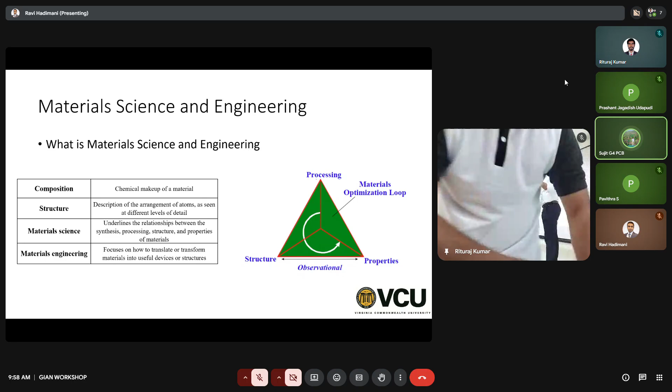Different properties, not just mechanical, also electrical. Your transformers and adapters, when you plug them in, have iron cores, and so many fans have iron inductors - those are electrical steels. There is structural steel and electrical steel. They may have the same composition, but their electrical properties and structural properties will be different depending on the crystal structure, morphology, and atomic structure. You can have the same composition in different crystal structures - that is the structure.

We have to first come up with the right composition, then the right structure, and then using the relationship between structure and chemical composition, you design the process - how to make this material. That is processing, and when you process with the right structure, you get the right properties. This is called material optimization, or material engineering - basically taking the right composition, right structure, and having the right process to get the right property. That is what materials engineering is.

Material science - usually wherever you find materials engineering branches or fields of study, it's called material science and engineering, because there's a lot of engineering to it as well. So this is material science - we will be looking at not just composition, but also structure in order to get the right property.

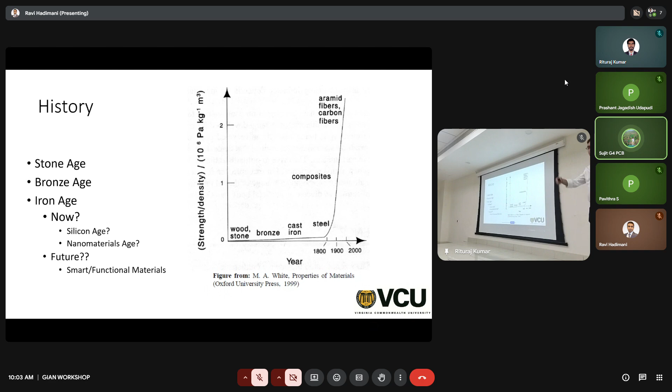So if you classify the materials, they are generally classified into four categories: metals, semiconductors, ceramics, and polymers. Metals are quite widely used for engineering materials, semiconductors for electronics, ceramics for high temperature applications, and also some functional materials are ceramics.

PZT - have you heard of piezoelectric materials? Do you know which is the most common piezoelectric material? PVDF is a polymer, yes. And the most commonly used one is called PZT. P stands for lead, Z is zirconium, T is titanium, so it's lead zirconate titanate. So it's a ceramic.

And then we have polymers, that is polypropylene, PDMS, PVDF, some cellulose-based polymers, hydrogels, and so on. And here is the new combination of all of these can be made into composites. So if you need a certain property of ceramic along with metal, but you need some flexibility, you can combine all these to make a composite material, which is a combination of all the materials.

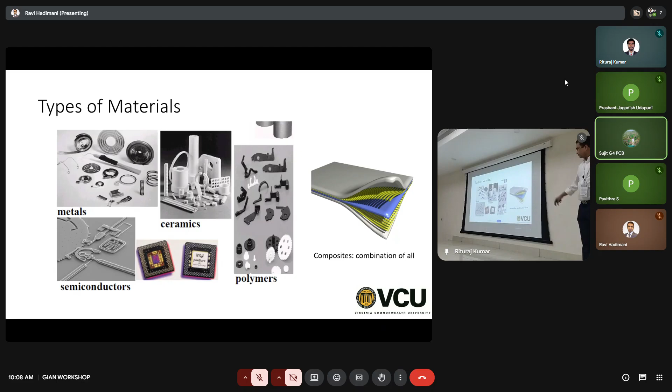But it needs huge computational power. You need supercomputers to do that. But if you have that, then yes, you can predict its strength. So that's now the scale of things, right?

In material science, nowadays we mainly operate at the macro scale. Now we are also doing the nano scale. Here are natural materials at different scales, here are the artificial ones, and at nano scale we operate nowadays. So, do you know your laptop?

It has an Intel i7, Pentium. How many transistors does it have? It's about 100 billion. The new i7 processor will have 100 billion in a single inch by inch square. 100 billion is a large number. It's hard to fathom, right? We don't deal with such numbers in day-to-day life.

What that means is the distance between the source and the gate in the transistor is close to around 2 nanometers. That's the level of engineering we are doing right now. So every 2 nanometers we have to put an electrode, a metallic structure, to make this number of transistors.

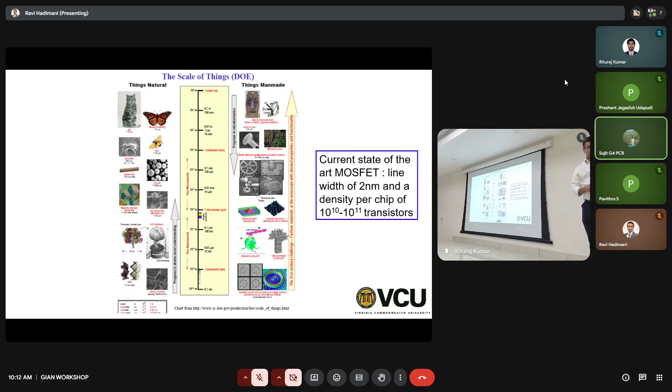So now let's go to smart materials. What are smart materials, or functional materials? It's interchangeable, when we say smart materials we mean functional. What are functional materials?

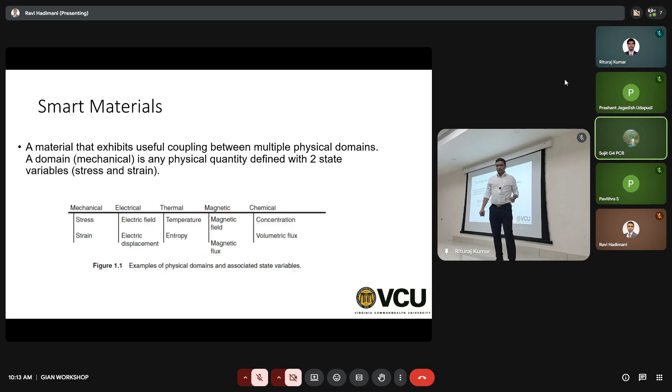Basically, when there is a coupling between 2 domains, that is, you apply stress and measure electrical stuff, which is voltage or electric field or current. You apply stress and measure thermal properties. So there is a coupling between mechanical, electrical, thermal, optical, magnetic. When you change one property and get a change in the other property, that's what we call a smart function, right? That is the coupling basically.

If you actually think about it, most materials can be made into smart materials. Because if you change the structure of the material, or apply a force, you're basically applying stresses to the crystal structure, bringing atoms closer together, changing the lattice parameters of the crystal structure. When you do that, the electric field also changes in the crystal, which results in some variation in the electric property.

But for a lot of materials, you will not see it. If it doesn't change the electrical property, its thermal properties might change. If its thermal properties don't change, its optical properties might. Something has to change, right? So we can actually make a lot of materials into functional materials, but some amplify it more. Those we call functional materials or smart materials.

They're very useful because a lot of the time we like certain materials, but for example, polymers are normally insulators. Can you imagine taking a polymer, applying stress to it, and getting a current out of it?

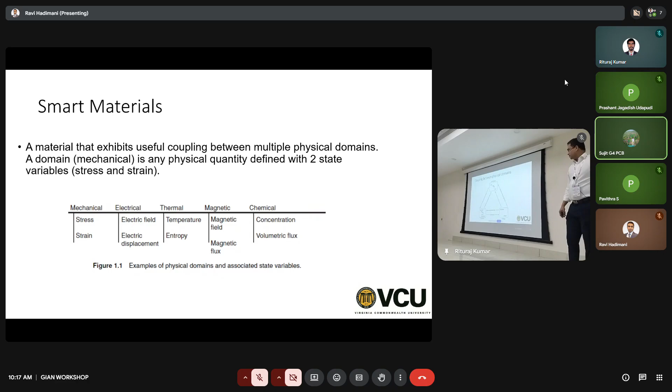It's easy to apply stress, and also easy to apply temperature. Now you can apply electric current easily because we generate it through circuitry. So that's the coupling between mechanical, electrical, and thermal. And if you add magnetic, optical, chemical, it becomes just complex.

Here is a diagram I didn't draw. It existed already, I thought it would represent this nicely.

If it is mechanical and electrical, you get piezoelectric. Direct piezoelectric effect is when you apply stress and measure current or voltage. But if you apply voltage and see change in the dimension of the material, that is converse or inverse piezoelectric effect. You apply electric field to get a rise in temperature of a material - it's called...

And if you apply temperature to a material and see change in current or voltage, that is pyroelectric effect. And similarly, temperature and mechanical stress - if you apply temperature, the material expands or contracts. That is coefficient of thermal expansion.

I don't know why these two arrows are the same way - if it's different, if you apply mechanical stress, you get temperature change. These are caloric materials, elastocaloric. So you apply stress and you get a change in temperature.

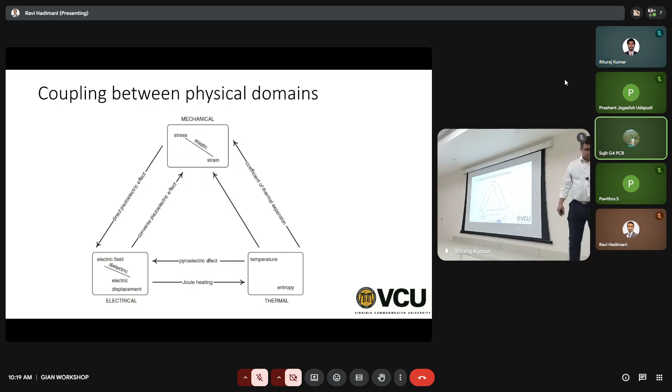So here are some examples: piezoelectric materials, shape memory alloys, magnetoelastic materials. Whenever there is 'magneto', it's magnetic field. You change magnetic field and you get rheology changing - that's changing the viscosity. And elastic is changing the modulus or changing the mechanical properties.

Caloric is changing temperature - this is magnetocaloric. Electrocaloric is you apply current and get changing temperature. Barocaloric - apply pressure, you get changing temperature. So elastocaloric and barocaloric: elasto means change in stress, baro is change in pressure. Stress and pressure have the same units, but it's the way you apply it - some are called barocaloric materials, some are called elastocaloric.

Then there are thermoelectric materials, thermochromic materials - you apply temperature, you get a change in color. That's because its optical properties change. Think of it, it's all like magic. If I show somebody a red polymer or metal, hold it at the bottom, then hold it on top and provide my body temperature, when it crosses 37 degrees centigrade, it changes color.

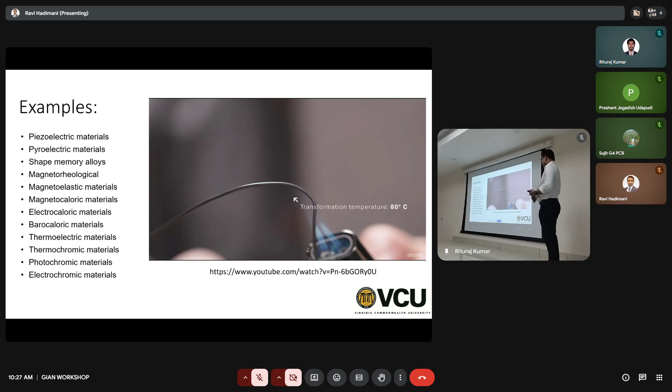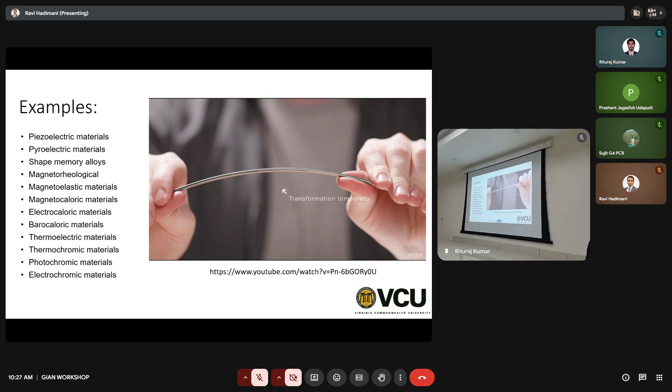So shape memory alloy.

It remembers its shape. What that means, what he showed there, I don't know if everybody understood it. Take this shape memory alloy, SMA,

take it to 500 degrees centigrade, which is its transition temperature, and then convert it into a certain shape. When you are at 500 degrees, you make it into a certain shape and you quench it. When you quench, it comes to room temperature. Now you remove its shape, you stretch it and it becomes a thin wire. And now if you go and heat it again, it will go back to its shape. So that means when it's at 500 degrees, you make a complex structure, even a Taj Mahal wire frame. Now you quench it and you remove all that, you make it again into a wire, put it on the burner and heat it again, it goes back to the Taj Mahal shape. That is the shape we're talking about.

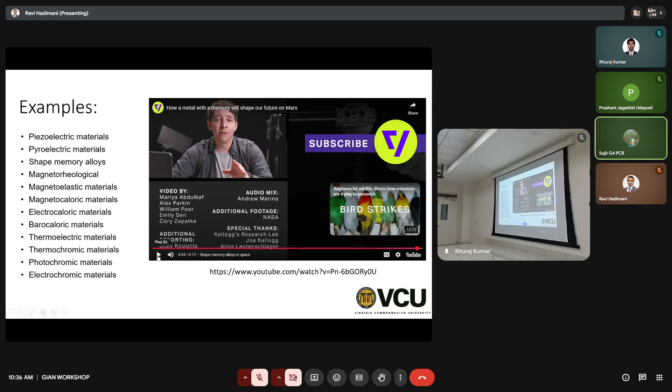Thinking of an actual device, right, or a sensor is also some sort of semiconductor device, but just a metal wire can act as a sensor or an actuator.

So now do you know what nitinol is chemically? Yeah, it's in the name, nitinol. So just imagine those two elements came together and made this really cool alloy. How many more such materials are hidden in these 118 elements? We barely know many of these elements. We just operate here because those are more abundant. As you go down the periodic table, they are there on the Earth's crust, but their usage has been limited.

Neodymium is used in the new neodymium iron boron magnets. We operated here. All these materials, this is responsible for silicon and germanium, responsible for our semiconductor revolution. Imagine if you go down further.

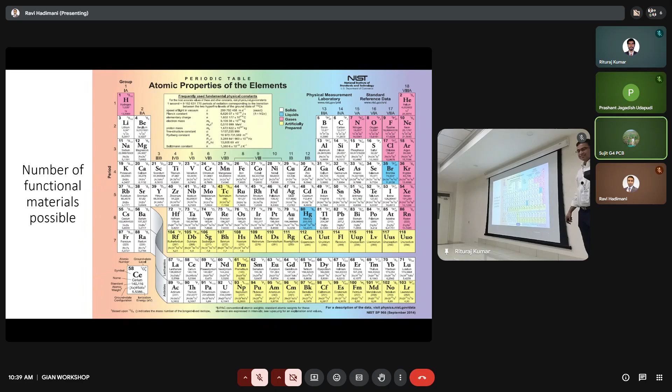Okay, so that is the composition, that is the chemistry, right. The shape memory lies not just in chemistry, it's chemistry a little, but also structure. Now let's go to pure structure.

Are you familiar with polymorphism? So basically it's the ability of the same chemical composition to occur in multiple crystal structures. For example, the iron system, that is iron and carbon, can occur in BCC, FCC, as well as another BCC that is different from this BCC. This is called delta iron, gamma iron, and alpha iron. This exists at very high, medium, and low temperatures.

So how many of you are familiar with the phase diagram, the iron carbon phase diagram? If you study material science, you have to know that. If you understand the iron carbon phase diagram, you will understand how amazing, how cool material science is.

Iron can exist in different crystal structures, and when they are in mixed phase, they form different crystal structures, then you alloy them. When you add carbon, you're basically putting these carbon atoms into interstitial sites in the crystal structure, changing its strength. When you apply stress, atoms normally move at a certain strength and create dislocation and plastic deformation, but when these carbon atoms come into the gaps, their strength changes. That's what we're doing here.

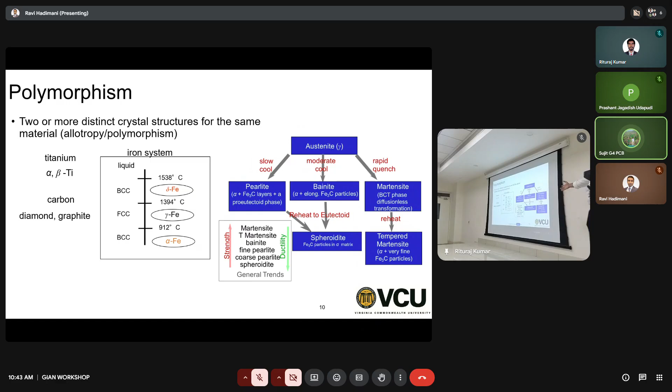These are all different forms of steel, and the ductility increases as you go down like this, and the strength increases as you go up. So you can engineer a material specific for your application. Swords need a certain strength, bridges need a certain strength, and rail tracks need a certain strength. So you can change it, and it's easy - you vary the carbon content.

So you're talking about only 6.7% carbon content. This is the binary phase diagram. Here it's all liquid, and here it's liquid plus solid. Here it's solid, with two different forms of solid. So it's a mixed phase here, single phase, mixed phase.

Depending on how much carbon you put, and also you can do thermal treatment - you go here and suddenly quench it, you block this structure. So there's so many things you can do, and they have done for ages. That's how we have so many varieties of steels.

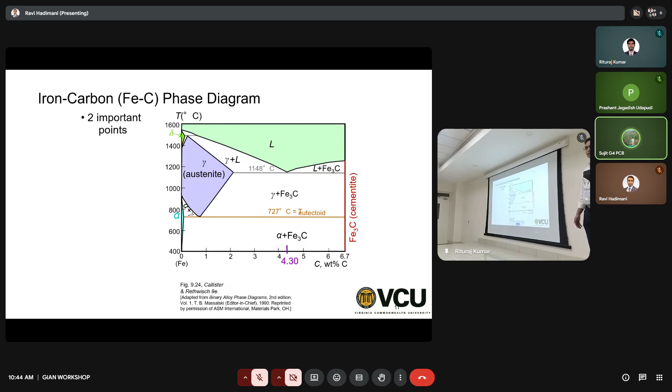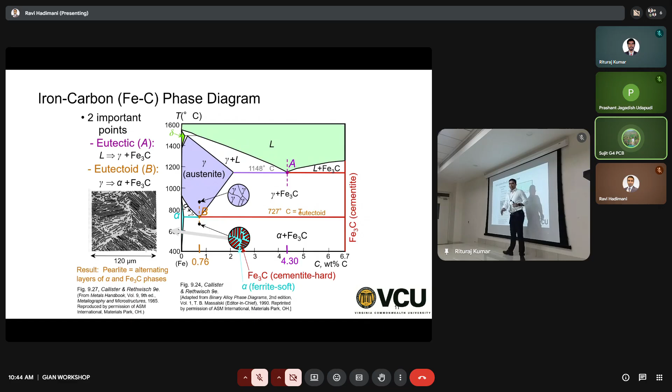This is pearlite structure, which is a very popular structure. And that was the binary phase diagram, iron and carbon. But if you do tertiary or ternary, with three elements, for example copper, aluminum, and silver, it becomes complex. Then there's quaternary, four materials, even more complex. So there's something called high entropy alloys - they have 5 or more elements. You're increasing complexity, but getting desired, really cool properties that you can't get with 1 or 2 elements.

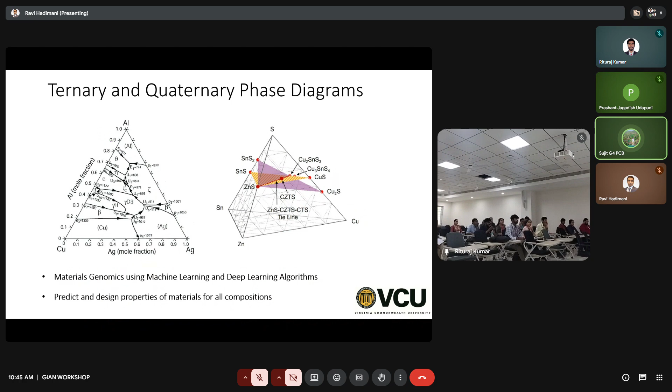There's a lot to explore there. It's what we call the wild west, even unexplored. There's so much you can do.

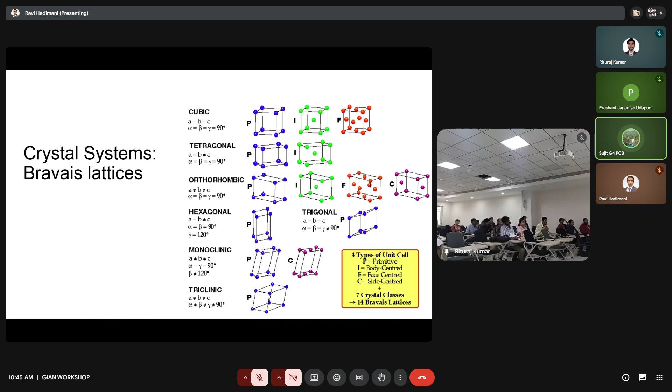Now let's come to the crystal structures - again, I don't know if this is fundamental. Basically how atoms are arranged - these are different types of crystal structures. If you have cubic, you have a nice symmetry, and you can have all these different arrangements, which you probably studied in your basics.

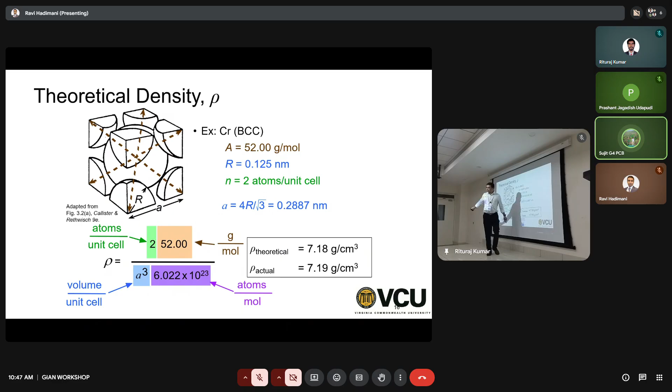This is BCC. BCC is 1/8 by 8 multiplied by 8, plus 1 body center - you get 2 atoms in BCC. FCC we have 4, and simple we have 1. This is the atomic weight, 52 for chromium, and divide by A cubed, that's the volume, then divide by Avogadro's number will give you theoretical density. So now my question is, how will you determine A and the crystal structure?

How do you know a certain material - if you have a material and want to determine theoretical density, how do you know the lattice parameter? Now we know what structure it is. If I give you a piece of metal and say calculate its theoretical density, what will you do? You need those parameters. How do you get that - A and crystal structure type, BCC?

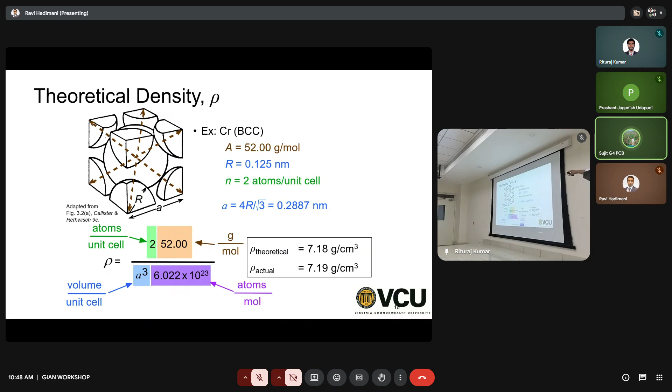Any guess? So different techniques are there. From XRD we can get lattice parameter and you know the crystal type, like BCC, by XRD. XRD is X-ray diffractometer. Are you familiar with XRD? XRD is a technique where you can determine what type of crystal structure and what are the distances between atomic layers. It is governed by a principal law called Bragg's law.

2D sine theta equals n lambda. So lambda is the wavelength.

So what happens is when you put X-rays on a material, X-rays go and hit the atoms and get deflected. Some X-rays hit the first atom and go there, and some X-rays go and hit the second and go, sensed by the detector. The detector is basically a sensor that senses X-ray. There is a difference in the path when the detector senses the X-ray, and that distance gives you the lattice parameter. So that is your D.

And n lambda, n is usually 1 because you get most of the deflections within 2 layers. Sine theta is the angle of incidence, that is theta. Lambda is the frequency, the wavelength of the X-ray. So this will give you D, the spacings.

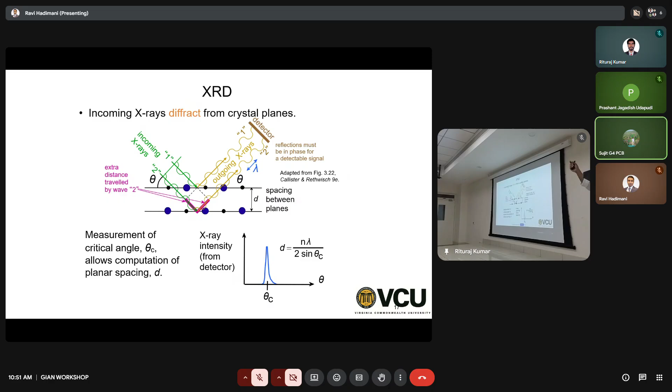And the patterns here will tell you whether it's a BCC or FCC or just a simple cubic. Once you know what type of crystal it is, what is your lattice parameter, you can calculate its theoretical density. You can also do a lot of other calculations. You can even find out its crystalline size or its grain size. You can even calculate if there is any residual stress inside.

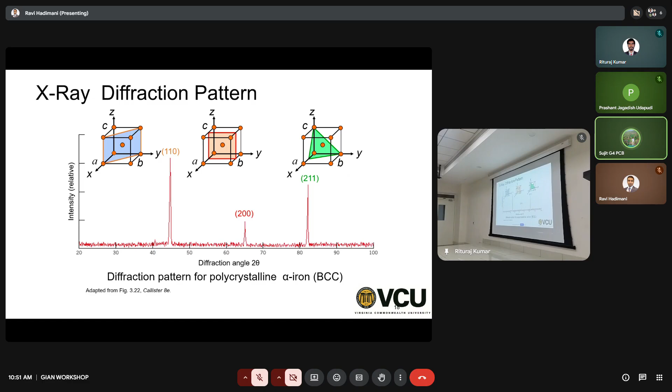And if it's an amorphous material, if it's not crystalline, the XRD result will show no patterns like this, no peaks, because there are no layers of patterns, so it doesn't get that D parameter. You have to have that D parameter in order to get constructive interference for the detector to see these peaks.

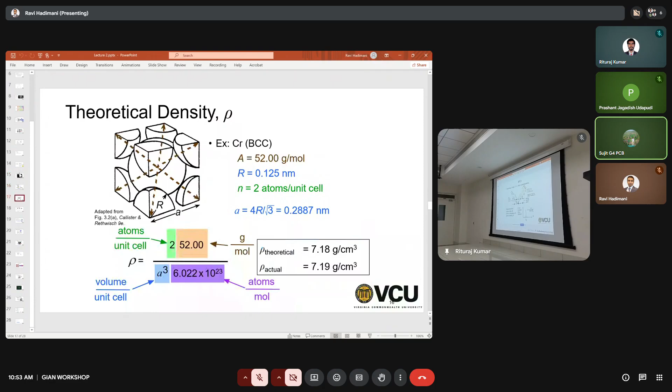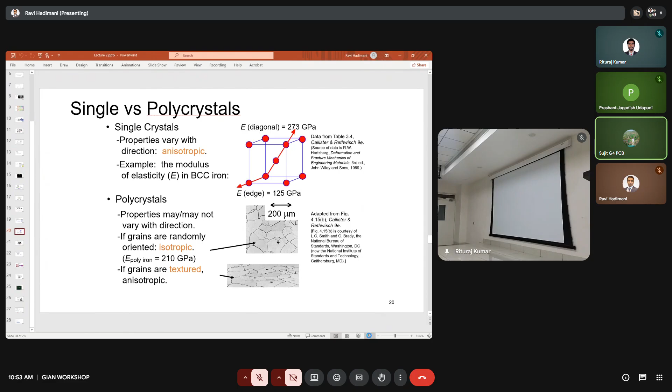Right, so now you looked at crystals and how crystals affect properties, and how crystalline parameters from the crystal can determine the density, its electric property, magnetic property, strength, thermal property, optical property, and so on. Now that's the atomic level arrangements, we finished the composition, now atomic level. Now we have to do the engineering part, the processing part.

So when you melt a material, let's look at a simple example of iron. When you take iron and melt it at 1600, 1650 degrees centigrade, it becomes liquid. When you start to cool it, what happens? It first becomes delta phase, gamma phase, and alpha phase, cooling down to different crystal structures.

But do you think it will all become one crystal structure, all the crystals aligned and having one nice single crystal? No, right? Because there are some impurities, it's impossible to have a perfectly pure material. Any small impurities will disrupt the crystal orientation and it will grow in different forms. And you see grains, right?

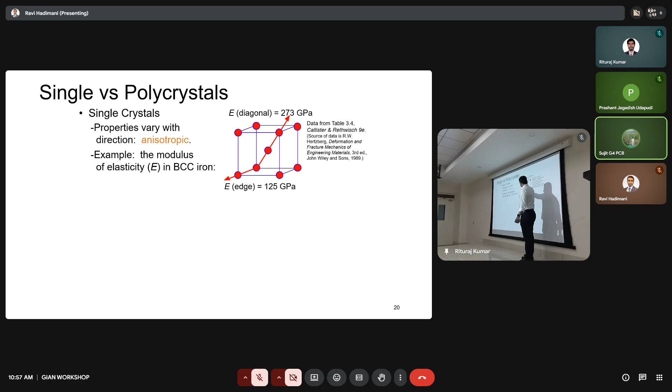So if you have a single crystal, what do you think will happen to the properties? If you measure properties—if you pull this tensile, if you measure tensile strength along this direction—what will be the strength, Young's modulus, versus if you pull it along this corner to this corner? Which one will stretch higher? Depending on the diagonal or this direction, it depends on materials, but they will have different properties in different directions. So that's one example of tensile strength.

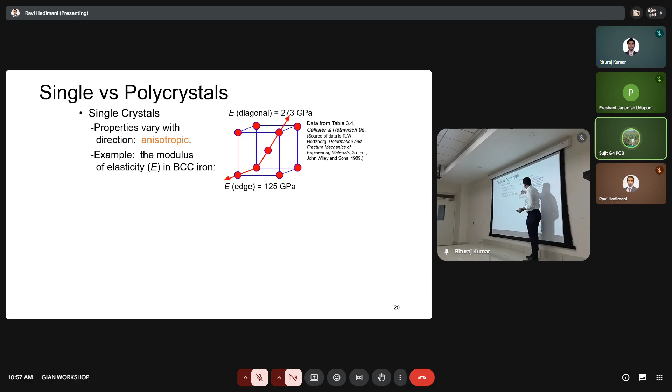But the same is true for electrical properties. If you apply a voltage from this corner to this corner, the conductivity will probably be higher here because the distance, the bond length, will be smaller here. Bond length and bond energy will determine a lot of material properties. By changing the crystal, you can get different material properties—you will have a different material property along the diagonal than along the side.

So that is anisotropy—you get different properties in different directions. If it's a single crystal, then everything is well aligned. So if you take a material and measure tensile strength along its shorter dimension, you'll get one property, but if you measure along the longer axis, you'll get another property in a single crystal. That's because they're all aligned in one direction—that is single crystal.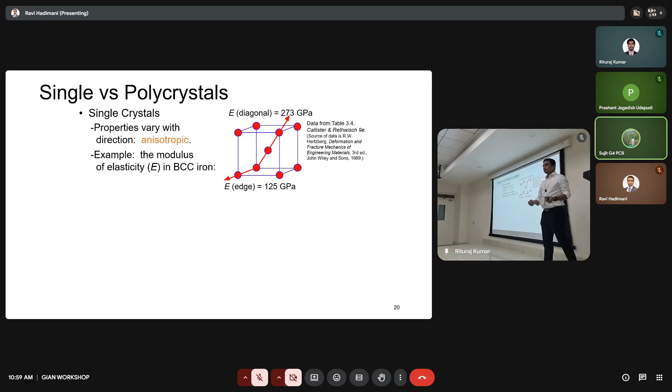But it's impossible to get a single crystal in a furnace at industrial scale. So you get all these different crystals oriented in different directions. What happens if you take all these small grains, where each grain is a single crystal material? Have you seen these grains in any of the examples I gave with pipes? You can see sometimes on these large metallic pipes, especially if the metal is polished, large geometric features on the surface—those are grains, nothing but grains. In those grains, each grain is a single crystal. Some materials can have large single crystals at a given processing parameter, and some materials can have smaller ones.

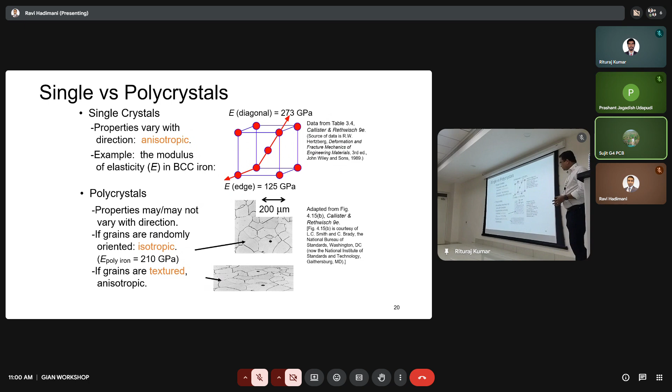So in polycrystalline materials, when the grains are all randomly oriented, what happens to your anisotropy? There is no anisotropy because everything is aligned—it all becomes a combination. So wherever you measure, your strength, Young's modulus, or conductivity will all be the same. Polycrystalline samples are not anisotropic—there is no anisotropy in polycrystalline samples. When you take an ingot, pour a liquid, and cut it open, these are the grains—that's how the grains are. Each grain is a single crystal, and they're all randomly oriented.

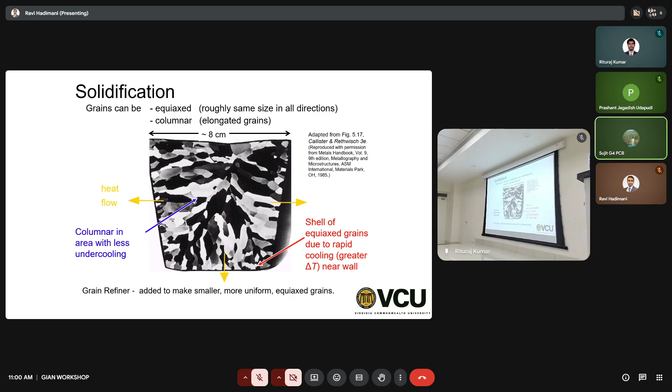So now the last engineering part. I talked about how composition can determine properties, how the atomic arrangement can determine properties, and the processing parameter of single crystal versus polycrystalline. The other engineering method is engineering the defects in the material. As I said, it's impossible to make a material that's perfectly pure, so you will invariably introduce lots of defects in a polycrystalline or crystalline material.

When the atoms are aligning, sometimes there might be a missing atom. Sometimes when it is aligning, it might just align in a slightly different direction. So these are all different defects. The types of defects are vacancy atoms, interstitial atoms, substitutional atoms, and dislocations. These are point defects. Dislocations are line defects. Does anyone know what the other defect type is?

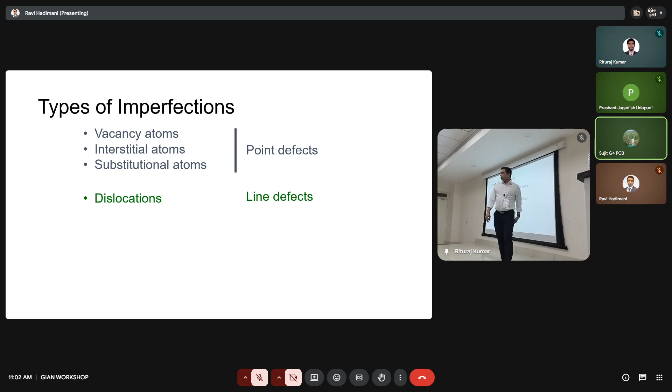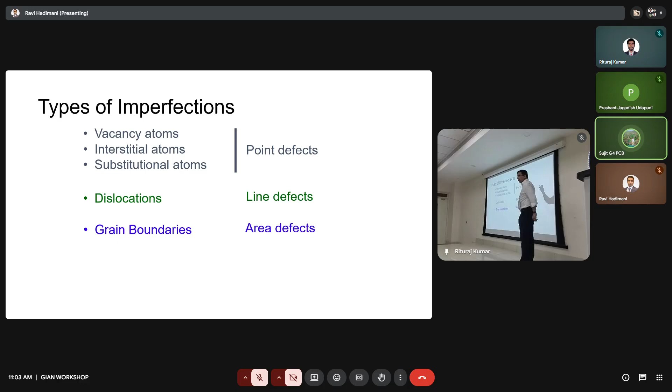These are defects, but actually you can use these defects to your advantage. For example, you can use substitutional defect—the way we make steels is nothing but substitutional defect. How do you think the carbon goes into the iron crystal? Basically you're putting an impurity into the crystal and changing the strength, the hardness, and so on. You can use these defects for your advantage, not just in tuning mechanical strength, but also in magnetics and electrical materials, where they play a very important role, especially dislocations.

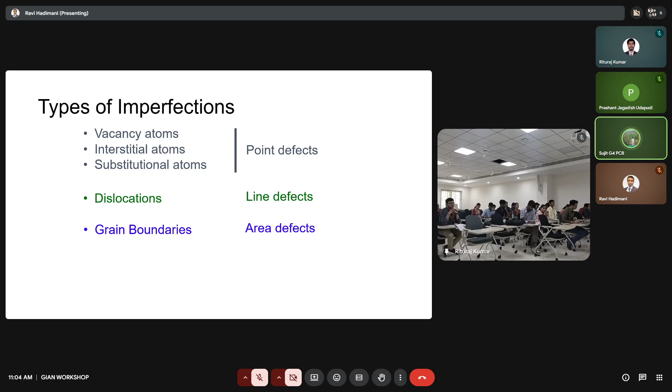We can control the percentage or density of dislocations and point defects to our advantage, and tune the properties of materials just the way we want by controlling the defects. The last one, grain boundaries, is used for catalysts.

So for catalysis, you create grain boundaries such that you create a lot of surface area, and that's what makes a catalyst. I'll take one more minute to show the difference between pure metal and substitutional alloy. Substitutional alloy is basically changing one atom with another atom, usually with similar atomic radii - for example nickel, cobalt, iron have similar radii, and you can substitute them without changing anything.

When you take an XRD of a substitutional alloy, you don't see any difference. Same with interstitials - you add some carbon to these elements, and if you take an XRD you will see the same crystal structure pattern. The lattice parameters might slightly change because these can introduce some residual stress. Then this is both combined, interstitial and substitution.

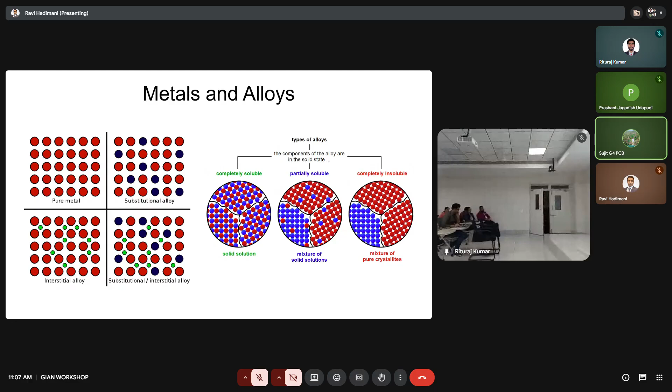Whereas this one will have one crystal structure. The XRD pattern will have one peak for this, but this will have a mix of peaks. This will also have different peaks because it's completely insoluble. And that's the dislocation - I'll quickly show you this video and then we will take off. That's the end.

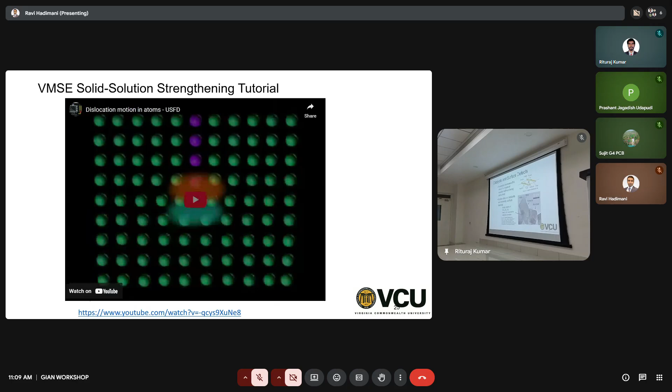Relieving stress by moving the dislocations through thermal treatment - dislocations can annihilate one another. Dislocations have directions, so when you increase the temperature, two dissimilar dislocations can come together and completely disappear. When you do that, you are decreasing the dislocation density. So when you decrease dislocation density, you are basically increasing the slip length, which means you can increase the plastic deformation - that is nothing but increasing the ductility.

When you anneal a material, you are basically removing dislocations and improving the ductility. It's quite widely used, where you can actually control the dislocation density to a point where you want to get the required property, not just strength. We can also do that for electrical property, magnetic property, optical property, and so on and so forth.

So I hope you got an idea now of how composition, atomic arrangement, processing parameters, engineering defects, and thermal treatment - you can use all these parameters to get a material property that you want. The material property could be increasing hardness in a diesel engine so that it can take higher pressure, or it can be a ceramic in a turbine that needs high temperature withstanding.

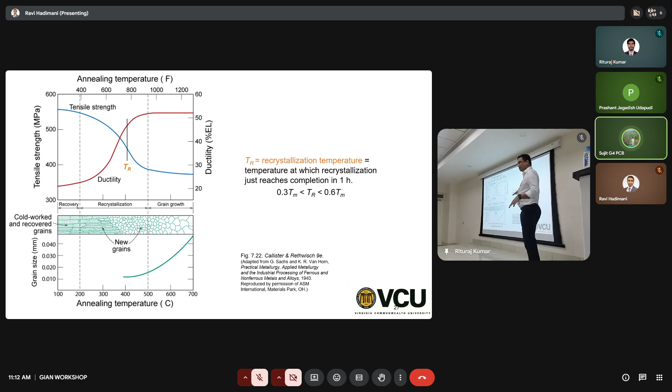Now we'll go into specific functional material. This is the foundation of material science, and now with these concepts, we will change the properties of functional material. I think that's the end of it - sorry it took a little longer because we started a little late.

So we'll go take a break for guys. Is it a tea time? Yeah, what? It's a break, okay.